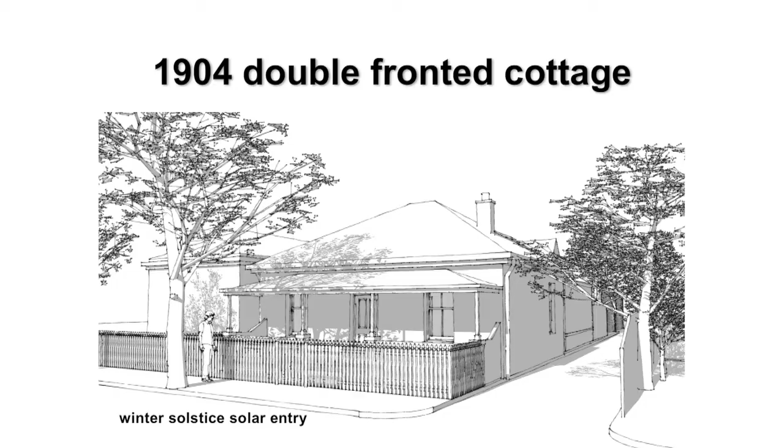That's the winter solstice. Great design. People often say to me, we used to design houses better than we do these days. You'll see this is a lovely veranda. It's a little turn of the century, 1904 cottage. And it stops all the sun coming in on the winter solstice. So it is cold, it is dark. The house is wonderful. Actually, my wife convinced me to buy it, because I knew what was wrong with it. And what is wrong with it?

Well, passive design doesn't exist. It's poorly orientated. The road frontage is north facing, so all of the living space, garden, etc. is south. Natural ventilation, it doesn't have any, because the sash windows have been painted over. Passive heating and cooling: well, it's definitely got cooling. I wouldn't say it's got much heating until we've had 40 degrees for 3 or 4 days, and then it's got too much heating. Shading, it's got lots of shading, but it doesn't work. No shading on the east and west windows. Insulation and sealing, you can probably imagine what that's like in an old house.

I did an energy star rating of it. It came out at 0.9. 0.9 is not very good in the overall scheme of things. It had terrible thermal comfort. It was ferociously hot in the summer, and dreadfully cold in winter, whatever other word you want to put in there. I can think of many expletives sometimes.

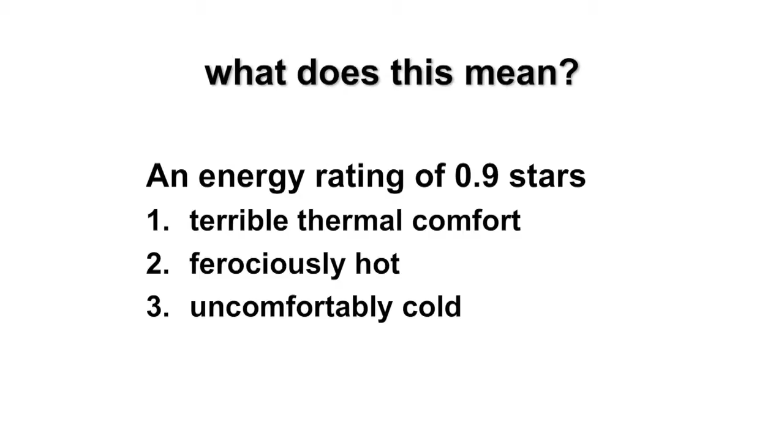Basically, at the end of the day, it compromised lifestyle. Okay, I did not enjoy the house. In fact, I've never enjoyed living in Australia because it's the coldest place in the world to live, if you come from the Northern Hemisphere. So for 3 months, I'm very unhappy. For the rest of the time, it's the best place in the world, apart from New Zealand. But I digress.

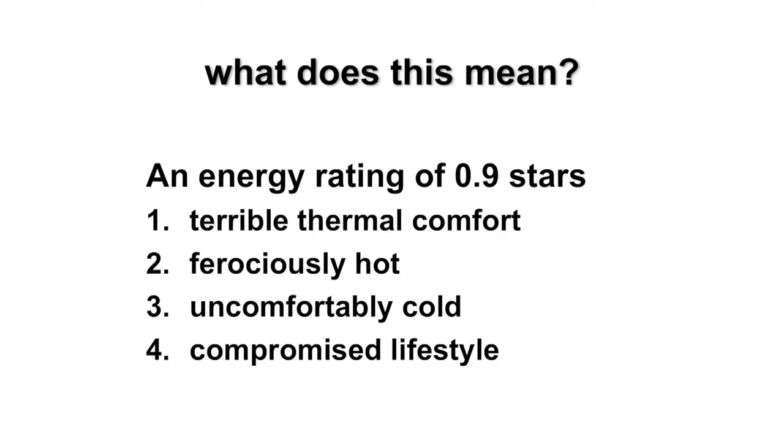And it was incredibly expensive to run. Phenomenal. I mean, now I would estimate our bills would be in the region of $4,000, and that's plus gas. And I'm reasonably careful with energy as well. So just for you, the people here, to understand what this Energy Star rating is about, it's about megajoules per square metre per annum. So the amount of energy that we use.

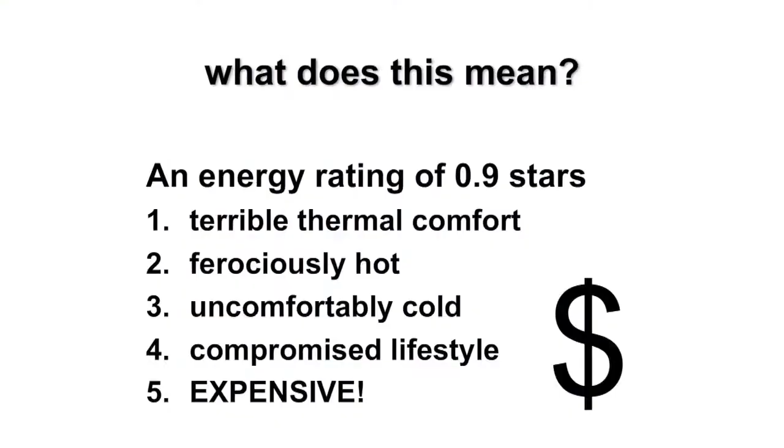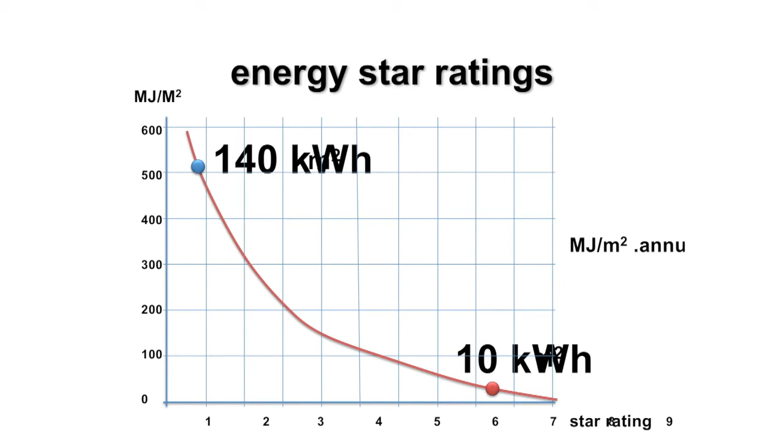And my house was up here. And what does that equate to? Well, it equates to something in the region of about 140 kilowatt hours per square metre, which is quite a lot, depending on how big your house is. But now, it's down here, which is 36 megajoules per square metre, and equates to about 10 kilowatt hours. So it's quite a difference. Yeah, that's a huge energy saving and a huge improvement. You can go much further, to 10 star, but it actually costs you quite a lot to get there.

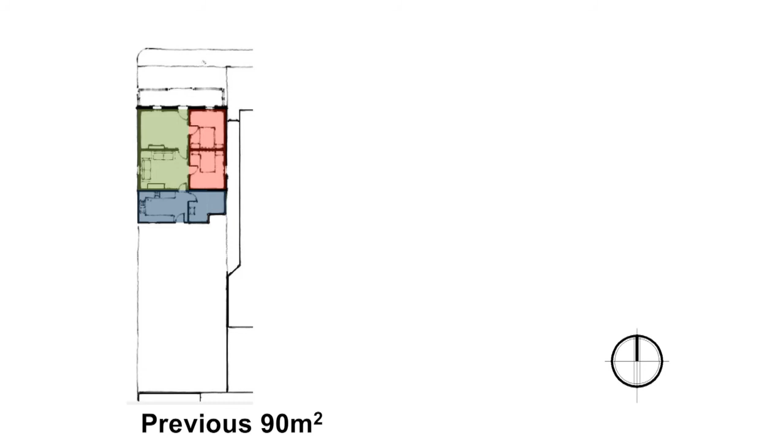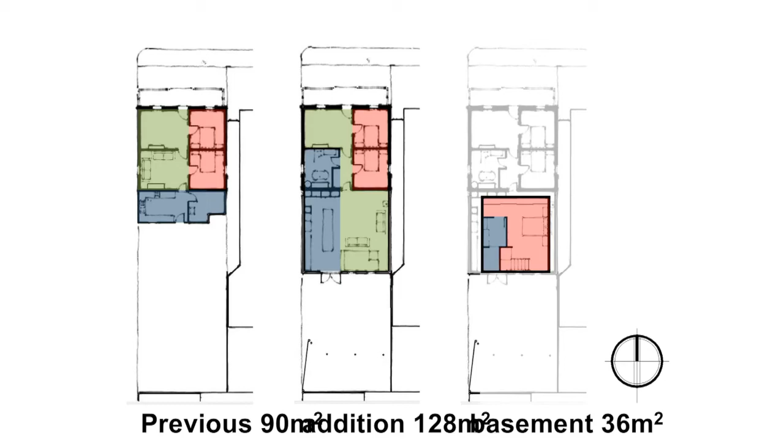Existing house, lean-to, I'm sure we've seen them before. Small lot, 270 square metres. Living space, sleeping space, utility space. What I decided to do was remove the area that bled energy and replace it with exactly the same 8x8 format, which is slightly better insulated. So we have living space, sleeping space, utility space, and more living space. We also have a basement, which gives us more utility and sleeping space. And I did that because I still wanted to have a garden remaining, rather than just building it out completely.

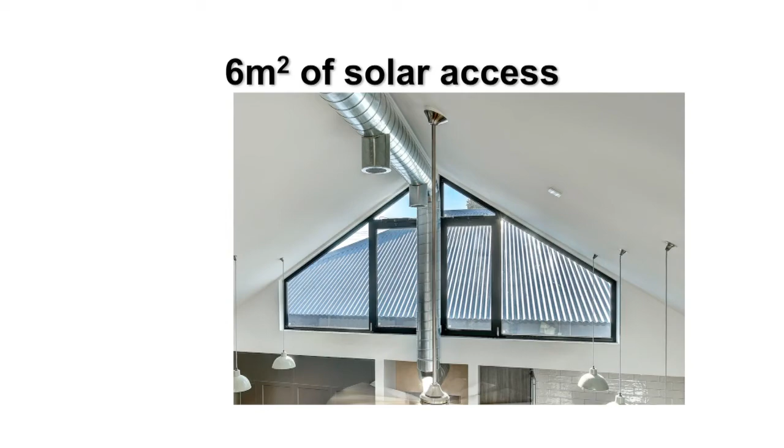Solar access, yay, through a large gable end, which gives me around 6 square metres of additional space. You can see it here. That's the old roof you're looking at here. And I'll get to the bit of shiny tin there in a minute. So what does that mean? It means that I can actually even illuminate my basement with sunlight. People think basements are dark and dingy. They're not. They don't have to be. Mine's actually lighter, ironically, than the front rooms of the house, which I find quite bizarre. People don't believe me, so if you don't, come and see for yourselves.

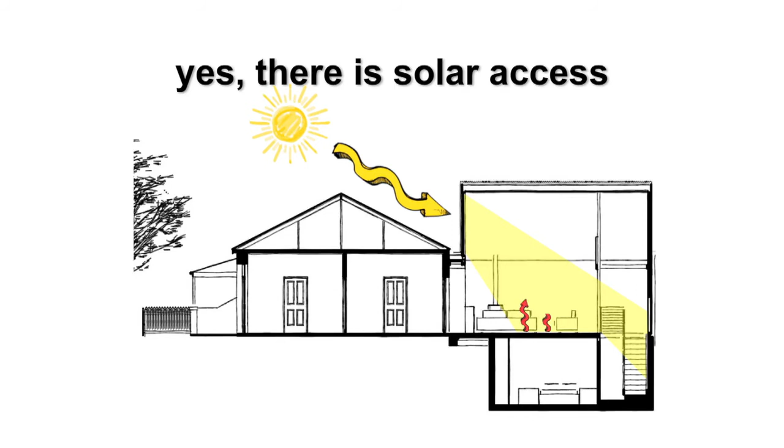Okay, now you certainly get a certain amount of solar gain there, and the typical natural temperature gain is about 5 degrees in winter on the room space. Passive, active in the winter, yeah, well what we have is a certain amount of heat that will come off the slab. It's a suspended concrete slab. There's also a slow combustion heater in there as well, which is a very efficient unit.

We have 1 minute left. Jeez, okay, I've completely blown this. I'm going to go very quickly now.

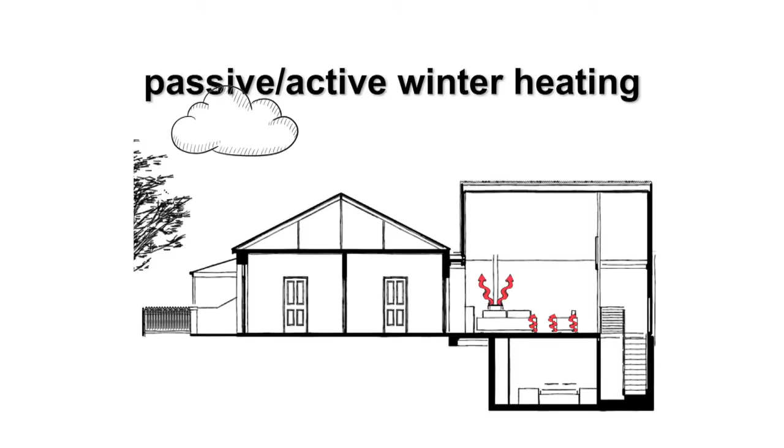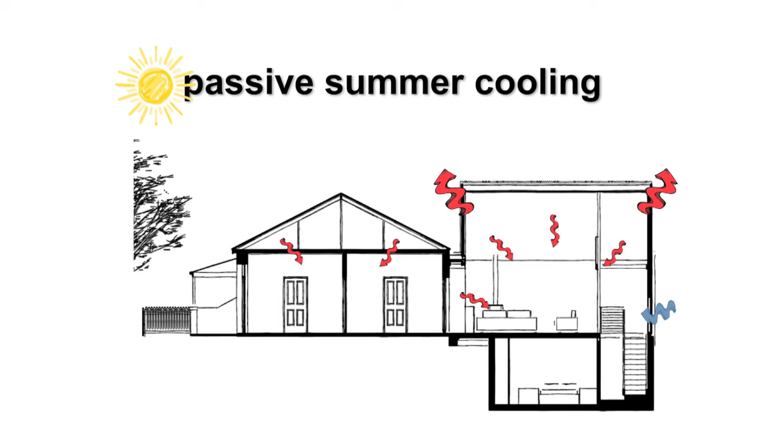There's a cool tube involved in there as well, which pulls in warm air in the winter, cold air in the summer. This is passive cooling. We have high-level windows, which are electronically controlled. And the effect, basically, is a stacked cooling effect. I'll go very quickly. There's a cool tube down there.

As you can see, I didn't actually practice this before I came. Okay, and there's a few more arrows. That's great, isn't it? We'll get to the last bit. Okay, I'm going to have to go very quick now. 22 seconds. Right, light bulb.